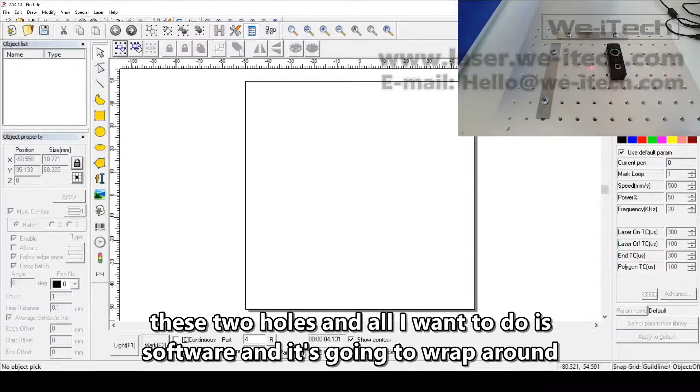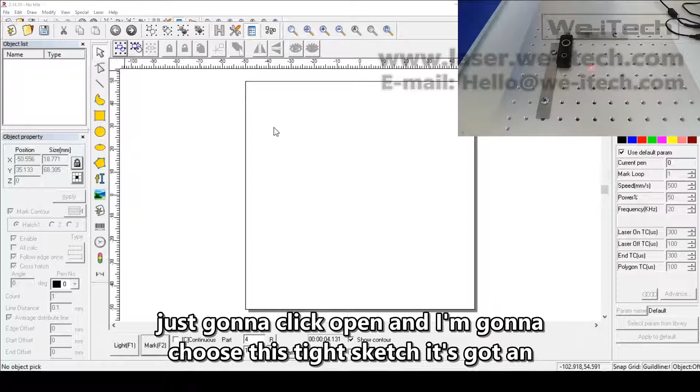And all I want to do is mark one at a time initially, and then I want to be able to mark multiples. And I didn't know initially when I bought the laser if EzCAD could do that. I found out it's not a big deal, and I'm going to show you how. So first I'll open my sketch that I imported into EzCAD. Now for our purposes, I've already saved my imported DWG as an EzCAD file, so I'm just going to click open, and I'm going to choose this tight sketch. It's got an EZD ending to it, and you'll see that pops up here.

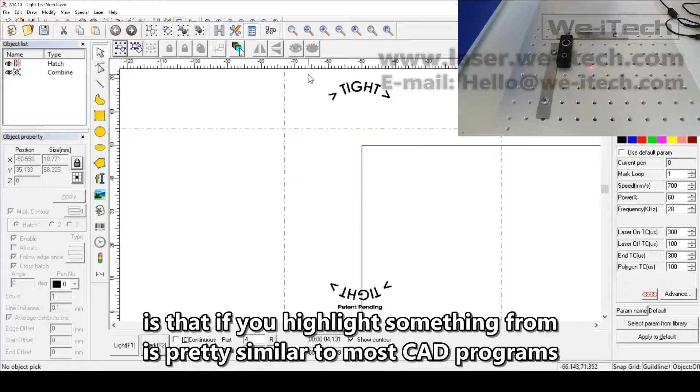I'm going to click this auto size button, so that zooms directly to resize so it's in my field of view. One thing that's interesting about EzCAD that's pretty similar to most CAD programs is that if you highlight something from left to right, it won't select that. See, this tight is all one sketch, it's all one object. So if I click it, you can see it's one object. It doesn't include this text down here, the patent pending. So if I go left to right, it won't select it unless I choose the entire body of text.

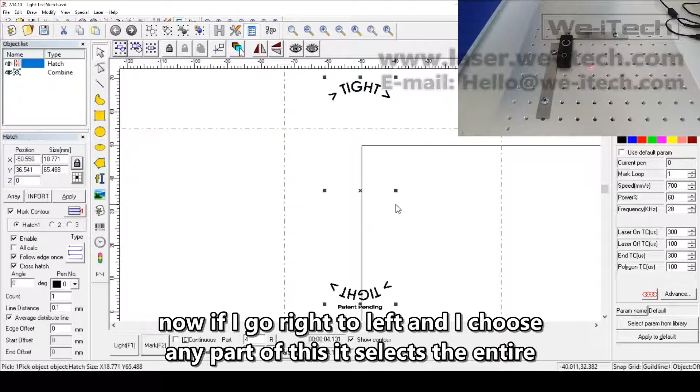Now if I go right to left and I choose any part of this, it selects the entire thing. It doesn't include the patent pending, that's a separate thing. You can see over here that one is the hatch, which just means I filled in the text, it wasn't outlined. And this is the combine, which is actually text I created in EzCAD directly. That was not imported from CAD. So if I go right to left and I choose any part of the patent pending, it chooses the entire thing.

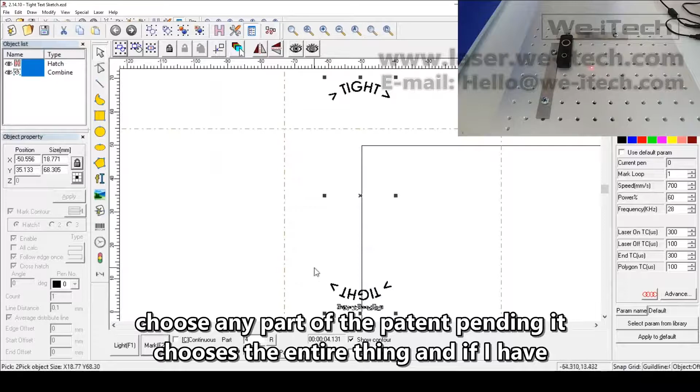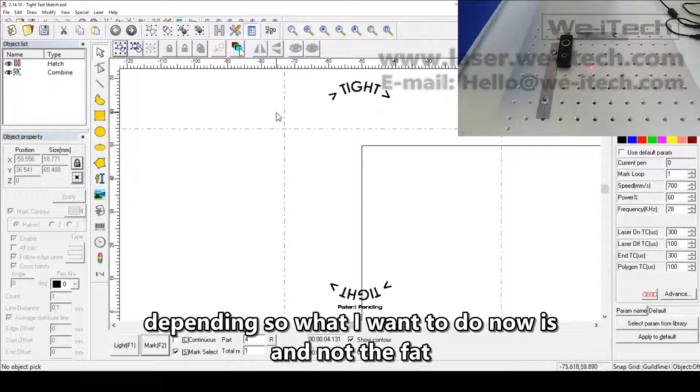And if I have this mark select button checked, this little checkbox down here on the bottom left, that's going to say if I mark right now, then it's going to include everything that's selected on the screen. If I just have the tight selected and I choose mark select, it'll just mark the tight and not the patent pending. So what I want to do now is see how this shows up on my part. So all I'm going to do is choose the entire thing, and you don't have to choose mark select. If you unselected that, it would mark everything that's on your screen anywhere. Sometimes you'll have multiple things on the screen at once and you won't want to mark everything. That's the purpose of that.

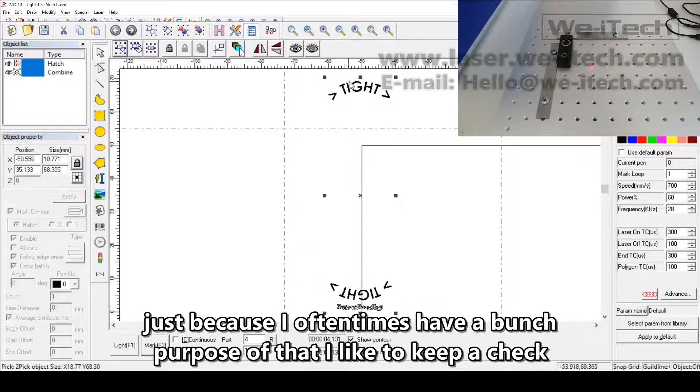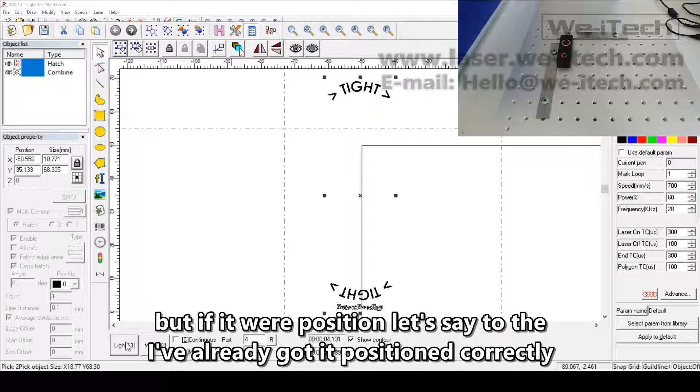I like to keep it checked just because I oftentimes have a bunch of these parts marked at once, and I don't want to accidentally mark a bunch of things that aren't on the table. So I'm going to do that, select the whole thing, press the light here. You can also use F1 as a hotkey, but I'm going to choose this light button, and you can see it's now showing up on my part. I've already got it positioned correctly, but if it were positioned, let's say to the right, then it would be over there. That doesn't look quite right, so you can just move it around with the arrow keys, or you can drag it around with the mouse.

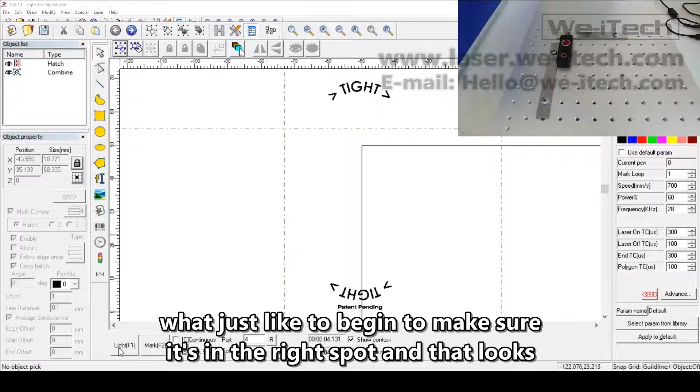I'll press stop, and I'll send it back to where it was. So we'll just light it again to make sure it's in the right spot. And that looks pretty good. So I'll press stop, and we'll do a test mark just to make sure it's okay. I'm going to choose mark select just because I like doing that. Down here it says it's going to make one part, and we've made a total of 4 parts.

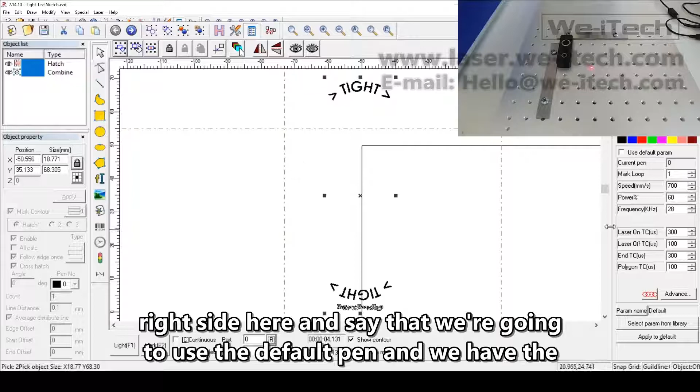I'll reset the counter. Our settings over on the right side here say that we're going to use the default pen, and we have the frequency set to 28. I think the lowest you can go is 20, that would be the most powerful, and 60% power. Speed is going to be 700, that's kind of in the middle. You can go anywhere from very slow to over 1,000 millimeters per second, which is pretty fast. So I'm going to mark this part just to see how it looks.

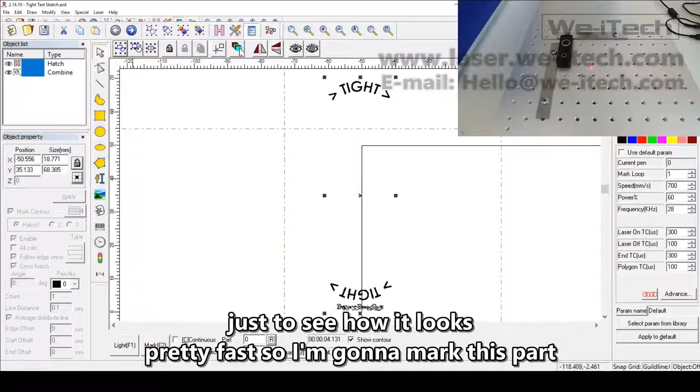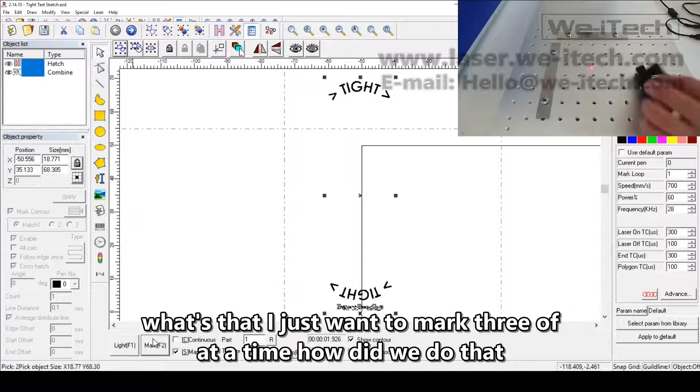So a couple seconds to mark it. Looks pretty good. So now I want to say, let's mark a bunch at a time. How do we do that? So let's say I just want to mark 3 at a time. Now there is a top and a bottom to this part, so I want to make sure it's oriented correctly.

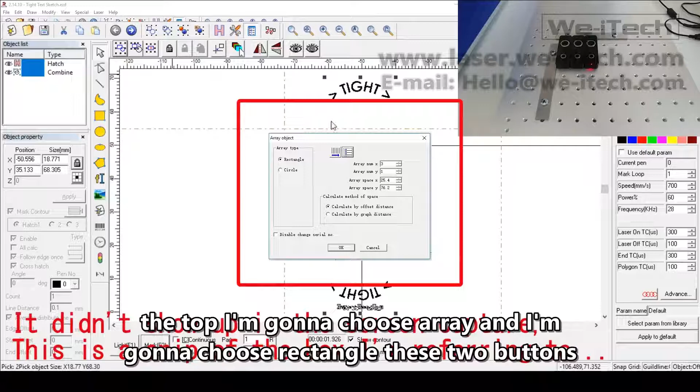So what I'm going to do is keep the entire thing selected, and I'm going to go up to this modify button at the top. I'm going to choose array, and I'm going to choose rectangle. These two buttons up here just control the order in which it marks your array of, let's say, sketch objects. I don't really care if it goes left to right, top to bottom, whatever it wants is fine. I'll go left to right.

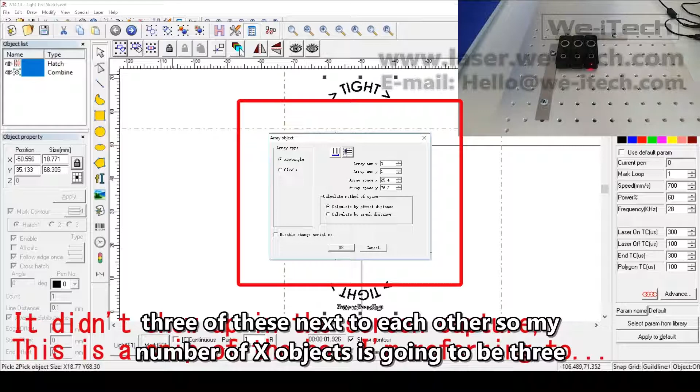So I want 3 of these next to each other, so my number of X objects is going to be 3. I'm just going to have one row, 3 columns. So I'm going to say 1. I don't want to repeat this in Y. It's pretty much the exact same as patterning something in regular CAD software.

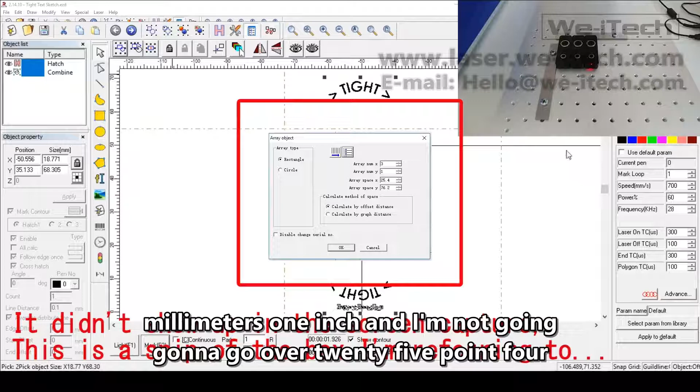For array X distance, these are 1-inch parts, so I'm going to go over 25.4 millimeters, 1 inch, and I'm not going to have any Y, but if I were, and I were doing 2, these are 3-inch parts, so it would be about 76.

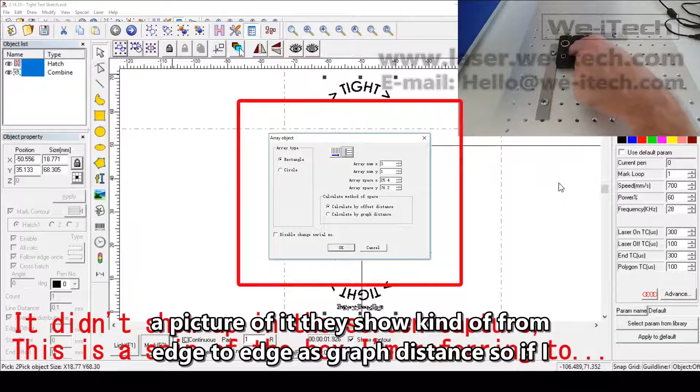So then you have the option of choosing to calculate by offset distance or by graph distance. Graph distance, they explain this in the manual, and if I can, I'll show a picture of it. They show kind of from edge to edge as graph distance. So if I had them separated like this, it would be the distance between these 2 parts. For our purposes, I think it's a lot easier since I have the parallels laid out, just to say from center to center, it's 1 inch. So that's all I'm doing there, and I press OK.

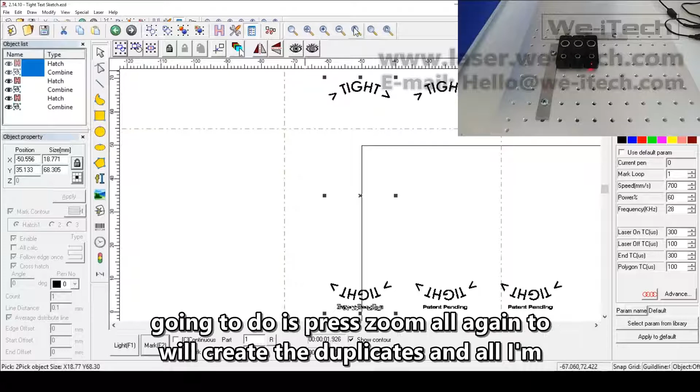It will create the duplicates, and all I'm going to do is press zoom all again to put everything in the center. I'm going to highlight all 3 of these, and you can see everything on the left here is selected, all of the objects. I'm going to press light, and you can see how that shows up when it's lit. Kind of goes across every single part you have there.

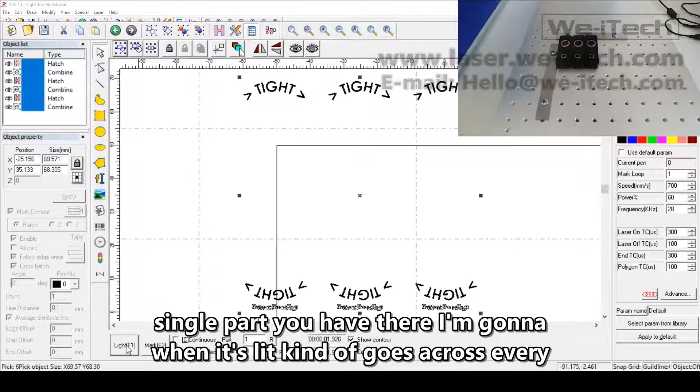I'm going to press stop, and if you want to make sure that your spacing is correct, you can just select one of these. It's a little bit easier to see, and press light, and you can just see how it looks on the 3rd object. And I'm pretty happy with that.

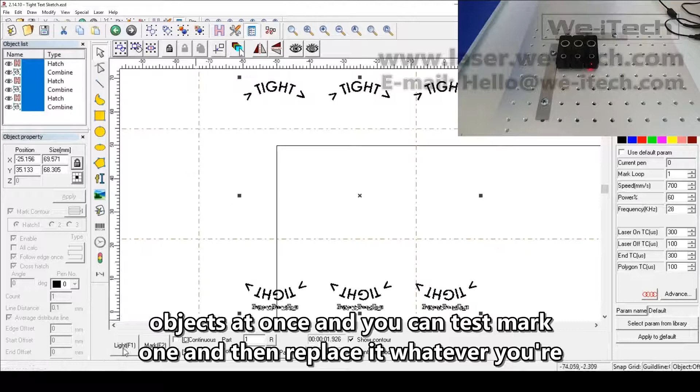So I'm going to choose all 3 objects at once, and you can test mark 1 and then replace it, whatever you're comfortable with. So I selected all 3 of these at once, have the mark select button checked, kept all my settings the same, and now I'm going to mark them. And you can see that marked from left to right. Looks like it came out pretty good.

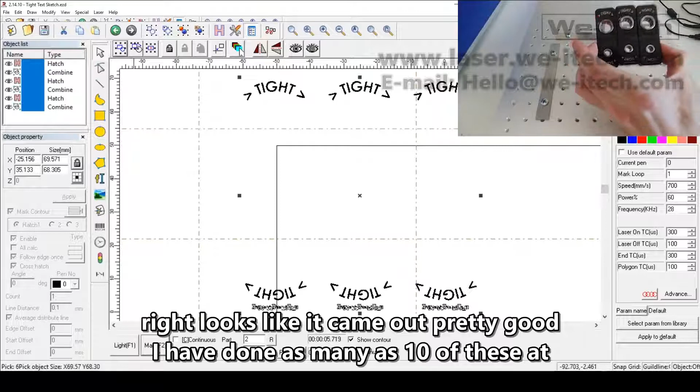I have done as many as 10 of these at once by doing 5 per row. The upside to doing that is you just click it and you can walk away for a minute or so. The downside to doing that is if you misposition a part or if you put something in upside down, you could end up scrapping 5 parts or more at once, which I have done, and that's not so good.

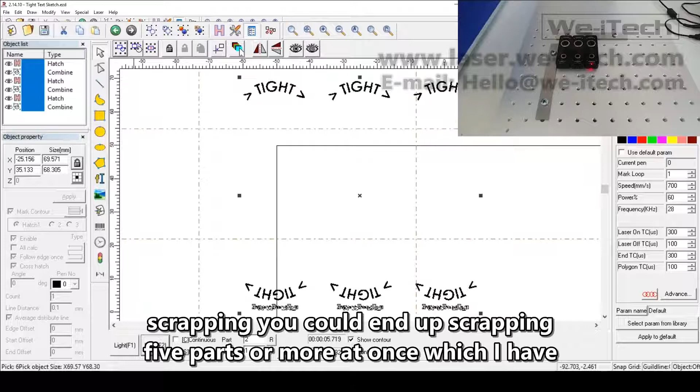Not a huge advantage to doing 10 at once like there is on, let's say, a mill where you have to deal with tool changes and that sort of thing, which really cuts into time. So it's pretty quick. You don't really have to worry too much about marking 10 versus 5 at a time.

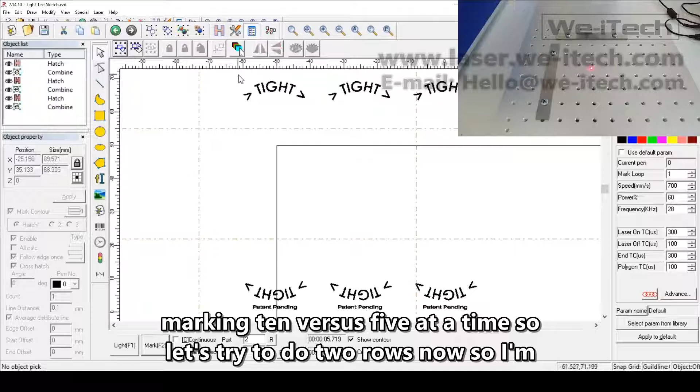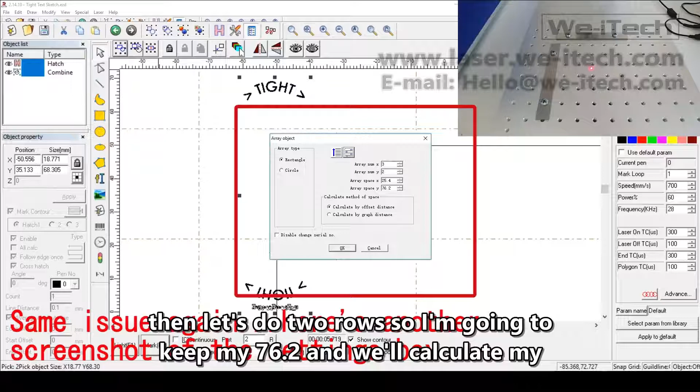So let's try to do 2 rows now. We don't have to start from all 3. Let's get rid of this first array. I'm going to highlight this again. I'm going to go into modify, I'll go into array, and this time we're going to still do 3, and then let's do 2 rows. So I'm going to keep my 76.2, and we'll calculate by offset again. So I'm going to say OK.

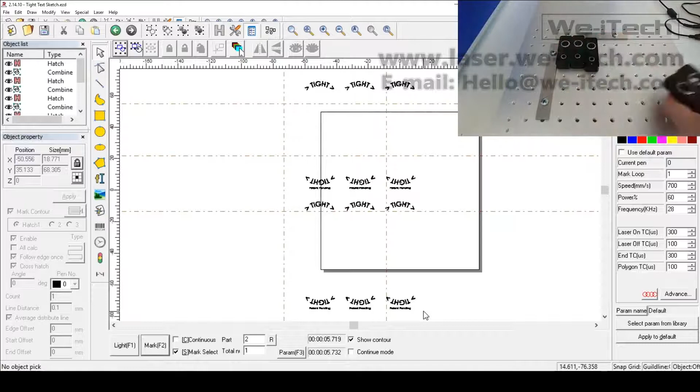Now we have 6 total parts here, and I'm going to do the exact same thing we did before, but I'm going to load 6 of these this time. Now I'm going to select the bottom right part, and I'm going to light it just to make sure I'm in the right position. That looks pretty good. And I'll select this one as well just to make sure I haven't made any errors. That looks fine.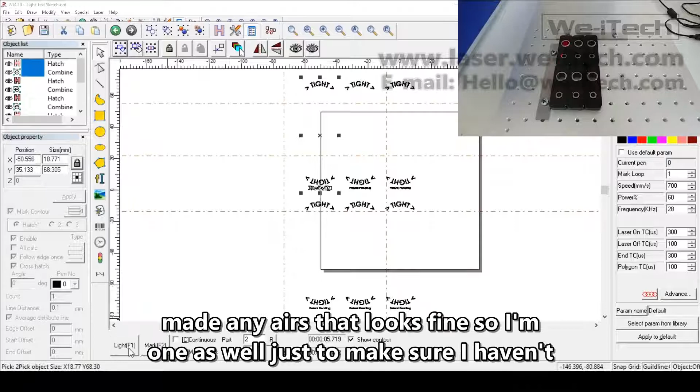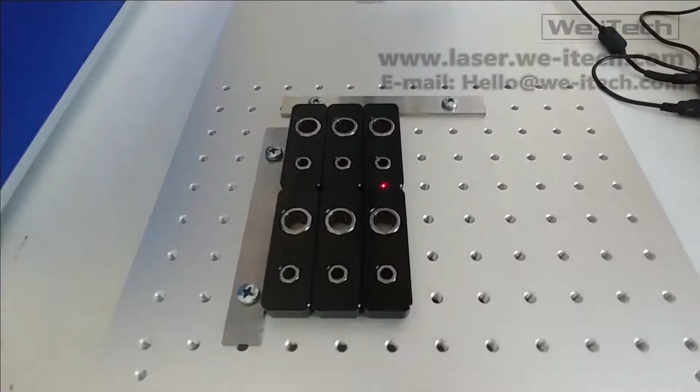So I'm going to select everything and keep my mark select box checked, and I'm going to go ahead and mark. So that looks like it worked just fine.

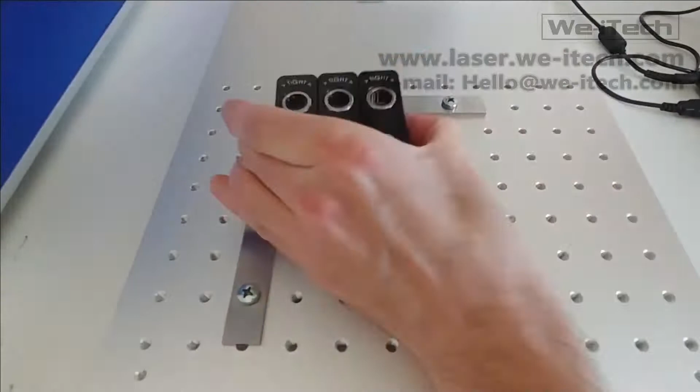So you can see it's a little bit faster if you can load 6 parts at once versus 1 part at once. Only downside is you increase your risk of scrapping things just a little bit. And it can sure be fast to scrap parts, especially since this is probably the end of the process here, after you've got all the money put into your part.

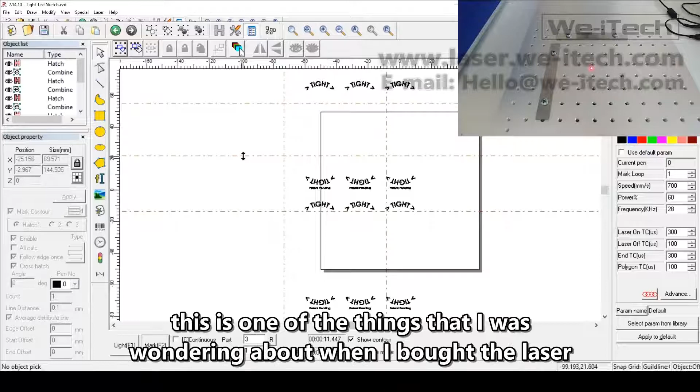But I just wanted to show you, this is one of the things that I was wondering about when I bought the laser and when I started using EzCAD. Could I do this? Was it easy to mark multiple parts at one time? And I found that, yeah, not a big deal.